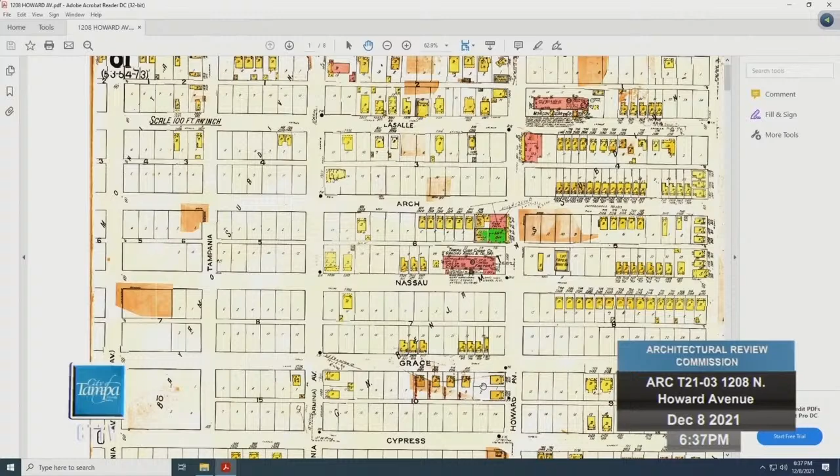I'd like to go through the photo presentation. It's a little different than what you usually see. This is in the West Tampa National District. The property in question is highlighted on the screen parcel here. This is Howard Avenue, and as you continue Howard to the north, you'll have the interstate that bisects it. I'll show you that in a current aerial.

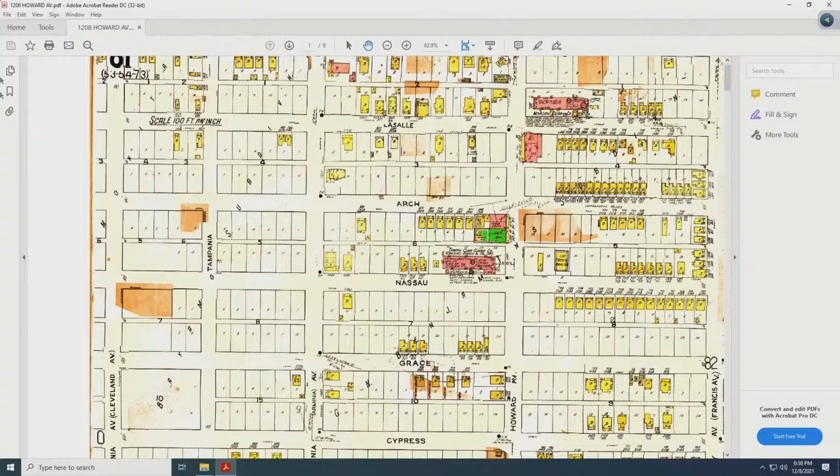This is a current overhead shot. The property in question is the period building, a 1-story building on Howard Avenue. As I stated, as you go down Howard to the north, you see the interstate here to get a point of reference.

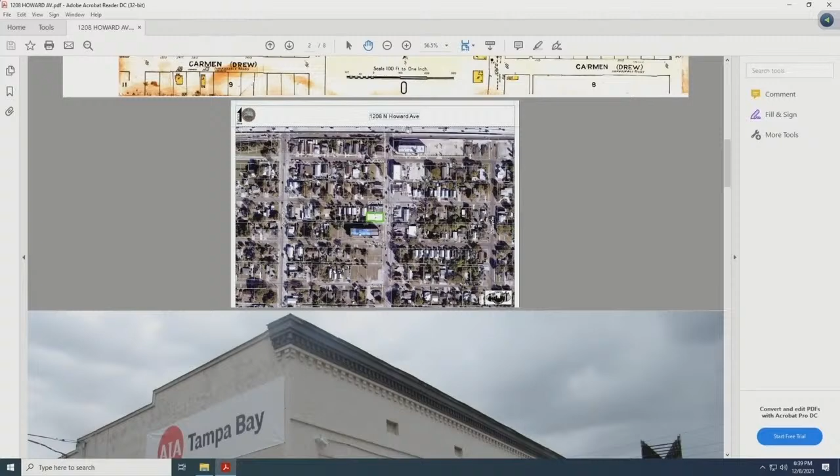This is the front elevation that's been modified, and the agent will share some other photos with you. This is Howard Avenue, so this is the east elevation, and this is the south elevation. Looking directly at the east elevation, which is the front elevation off of Howard. Once again, this is the east elevation, and this is the south elevation.

There is an open alley that will be improved as part of this project. Moving around to the rear elevation, which is the west side, there is a courtyard there that will accommodate parking. And just the last photo I'll share is, once again, the rear—you see some of the openings that were there, that were closed in, and then the parking courtyard.

At this time, the agent could address the board.

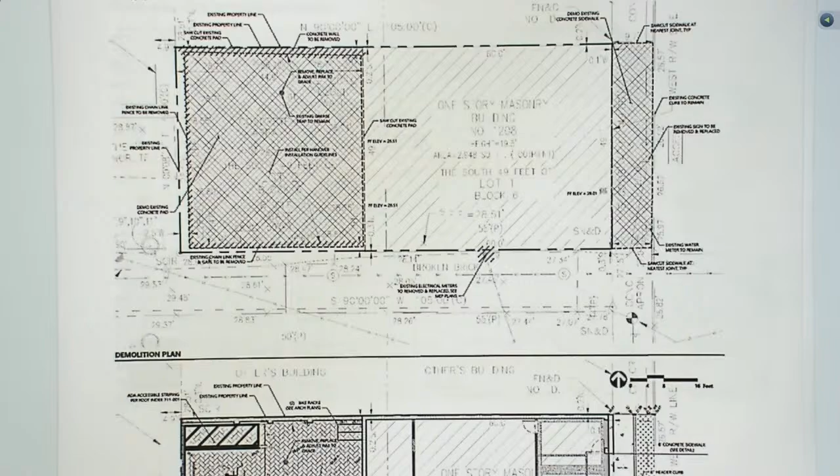I'll move this up a little further so you can see. We'll be able to get 4 parking spots in. We've already gone through the City of Tampa for design exception 1, which they approved, to have those 4 parking spots and bike parking. On the east side of the building, we'll improve that sidewalk and add a grassy area to match what's in front of the cigar factory right now.

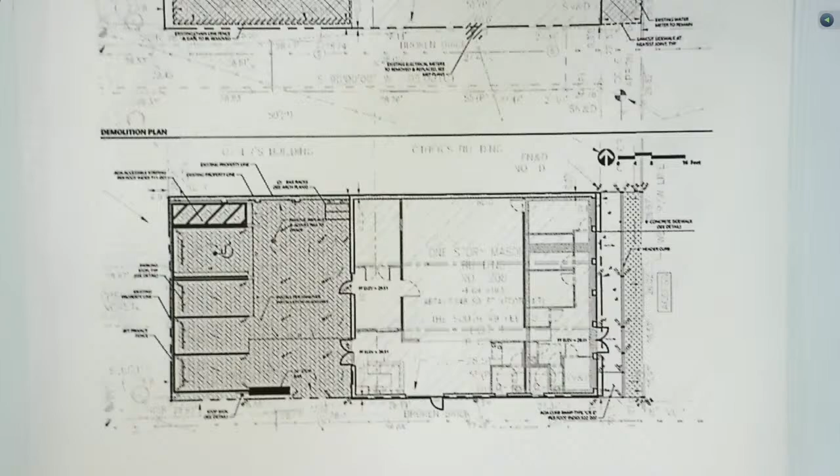What we'll be using the property for, as Ron spoke about, is for AIA Tampa Bay's new headquarters and home office. So it's going to house AIA Tampa Bay, and it's going to house the Center for Architecture and Design, where we'll serve not only our members, but the community through programs at the center.

You can see in the front facade there are architectural elements that were very common back in the early 1900s, with the cornice work on top, some corbelling over the window openings, and brickwork on the bottom. We'll have some details of those so you can see them. Our purpose for the outside of the building is to remove all the elements that were put in to hide those original features from 1904, to bring back what was happening on the street front when it was such a vibrant neighborhood, and we're helping to do that.

You can see the cornice work up there, the corbelling and the dentiling that's happening. It's in relatively good condition. We are going to restore it, and it's going to be painted. We'll show you some colors as we get into the presentation, but this is part of the characteristics of the building that we want to maintain.

Also, back in 1904, there was interstitial space between the roof and the attic, and these are typical to the buildings of that time. There are vent ways to make sure that the attic was vented and that water damage didn't happen through moisture. We're going to keep those and also accentuate those so people can understand what those were.

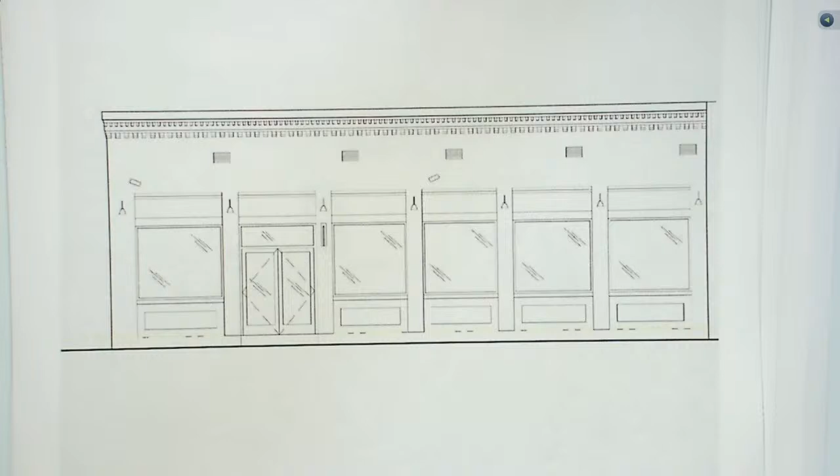This is a sketch of the proposed elevation of the building, the front elevation you'll see from North Howard Avenue. We're maintaining all the original brickwork and opening up those windows so you can see what it was like walking down North Howard Avenue back in 1904. This is a quick rendering of what we're hoping the building will look like once we finish the repair work on the outside.

There's some inside features we'll talk about as well. You can see the storefront, black trim, gray for the vents and also for the cornice around the top. We're going to have some period appropriate lighting on the outside, and the alleyway will be restored as well.

We would like to restore it. We understand the cigar factory next door has it in their scope of work, so we're working with that architect to make sure it gets brought up to speed.

For colors, we have a white for the main body of the building, and as I was explaining, the cornice work up top and the vent work would have the highlights of the cityscape gray.

The lighting fixtures we're proposing would be these. They'd be placed between each of the windows down North Howard, and we're also going to have a couple of these, since you'll see them from North Howard Avenue, highlighting the brand signage for AIA Tampa Bay and Center for Architecture and Design on the south facade.

YKK is going to be our storefront window of choice. We're going to use black trim, despite the other colors there, on the storefront windows, the storefront doors, and also on the south side and east side.

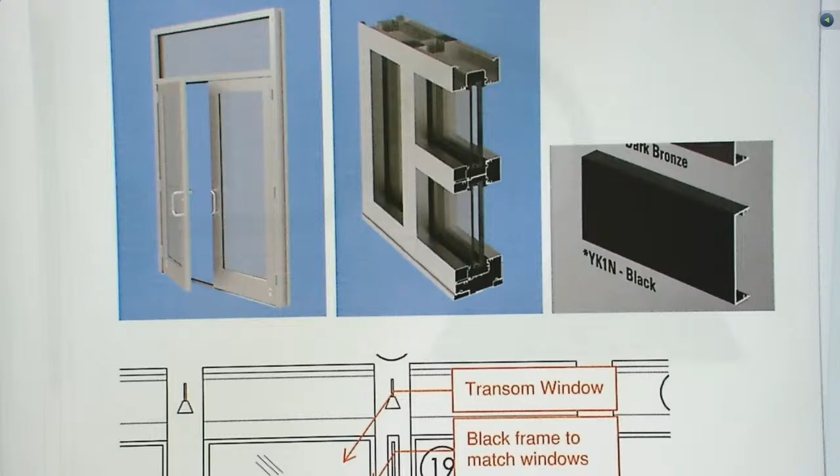On the east side of the building, the left-hand door will be a YKK door. Slim Pack, the door you see in the image below, has offered to also enhance the building with us, so that'll be the right-hand side door, a Slim Pack door. That's actually going to be the main entry because it's off the parking, so it'll come off the parking right into our entryway. Whether it's the YKK doors or the Slim Pack doors, it'll open up the views to the historic cigar factory to the south of us, which would be great.

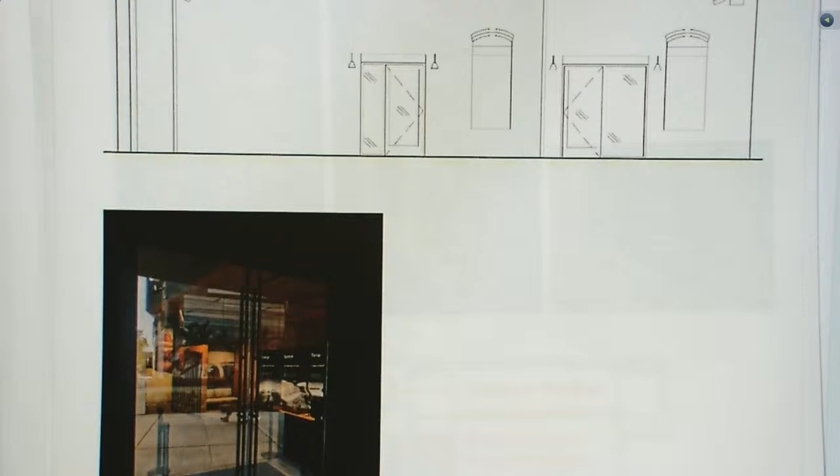To tie in with the color of the rest of the lighting, we need some safety lighting on the building. These are the fixtures we'll be using on the south side and east side of the building for safety.

And we will remove the exterior slab that's providing parking now, and improve it with some pavers—colors still need to be selected. It'll be a herringbone pattern so it can withstand the traffic flow coming in and out to our parking spots. When the spots aren't used for parking, we're going to use it for community events and board events as well.

We'll move to the inside of the building.

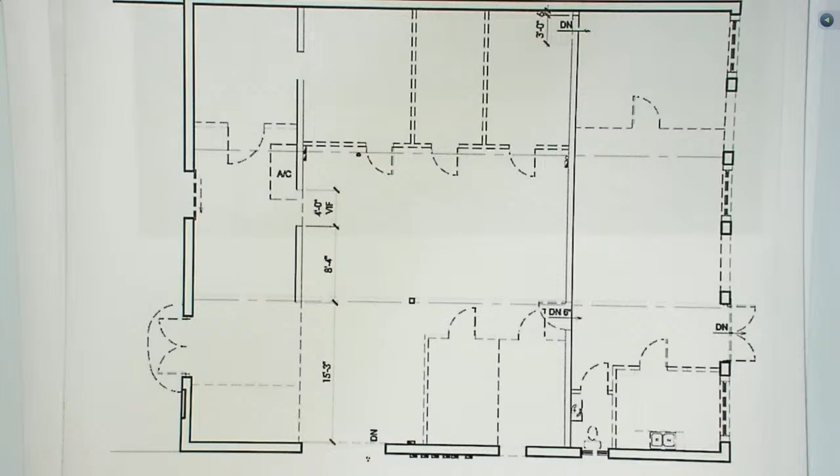On the inside of the building, there's a couple of things happening, but it's really the western side on North Howard, this area here, that has historic elements—a terrazzo floor, a stamped tin ceiling, and some older casings around the doors. We'll get into some of those things a little later, but our intent is to keep all of those floors.

One of the things we want to do is keep them and restore the floors. Where walls are removed for the new space, we're going to have a terrazzo company come in and match the color of the terrazzo so it's continuous from one side to the other and matches what would have been there.

The bases on the floors are a combination of things, but we did find this clay tile base, about 8 inches high. That's all going to stay in place, painted a different color to match the new color scheme on the inside. Where we take clay tile base off some of the existing walls, we're going to use it to patch the other walls together.

The clay tile base wasn't the only base that was used. On the North Howard side of the building, the base was a wood base. So where we're putting in new base, we'll use the wood base so we don't confuse it with the original base that was there, since we don't think it was original. I've got two more pictures coming, but we'll get to that in a second.

The stamped tin ceiling - we have a couple pictures of that right now. Over the main portion of the North Howard side is a 2x4 acoustic ceiling, hiding what's there, but it's stamped tin ceiling, complete with crown molding going around. We're going to save all of that throughout that entire half of the space. One office was already improved, so you can see how it's going to look - our stamped tin ceiling will be painted white instead of brown. All of these elements are only on that North Howard side of the building.

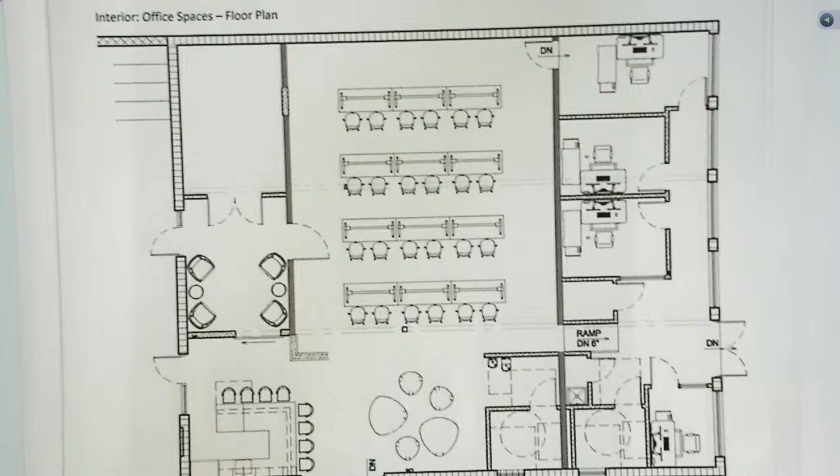This is what the proposed space will look like at the end of the day. As you can see on the North Howard side are our offices. We have 4 offices, we have the restroom, and we have a new restroom on the other side of that demising wall, in that space where our gallery is going to be. And that gallery is for community events and art galleries.

Is that telling me to stop? Yes, sir. Okay, I'm almost done. You want me to stop or keep going? Let's stop, and then if we have any additional questions based off that, you'll have time to answer the rest. The rest are finishes and things for going forward, but we hit on all the historic items.

Thank you. At this point, staff will present the staff report.

Good evening, Commissioners. Ron Velam, staff with Historic Preservation. The request this evening is for an ad valorem tax exemption, Part 1. This is pre-rehabilitation.

So through this adaptive reuse request that you saw this evening, we look at the exterior and the interior, whereas a lot of other requests we just look at the exterior. If this moves forward tonight, staff is involved with the process throughout the rehabilitation, and then he will have to come back for Part 2 of the ad valorem to show you the post-rehabilitation.

When we met on site, we look at the building and see what the building is telling us. There's a lot of scarring that's left behind. You have to do some forensic work, they opened up some walls to kind of see exactly what's there.

If there's missing elements, the Secretary of Interior standards state that you could use an appropriate alternative material. So the materials for the storefront don't have to go back to a wood storefront that would have been originally there of the period. So the products that he showed tonight are consistent with the Secretary of Interior standards. I'm here to answer any questions.

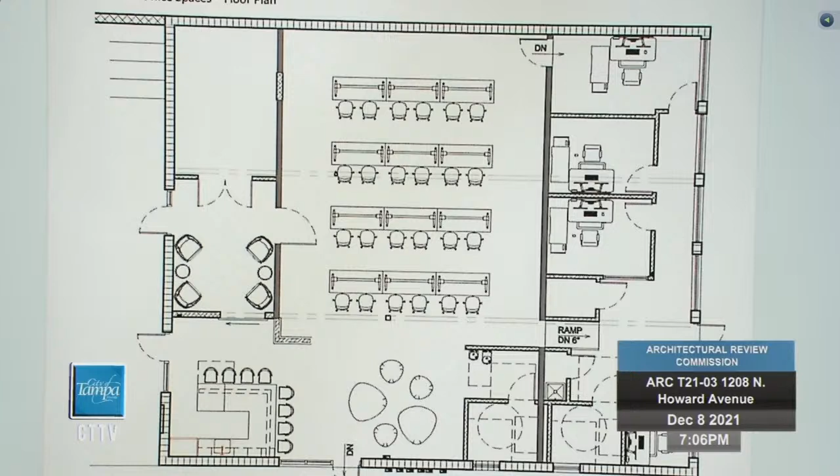You're opening up the windows. There's kind of a chain of questions here. Was the building initially a bakery or a restaurant? It was initially a restaurant. It had a lot of uses over its years, as you can imagine, but it started out as a restaurant that served at the cigar factory.

Over time it was a bakery, and it was a yeast factory - Fleischmann Yeast - for a while. It had time as a furniture shop, and most recently it was just storage for whoever owned it. Because you're opening up the windows, and we're now trying to pay attention to pedestrians, you have mostly blank walls - you're going to look through those windows and not see much.

I was wondering about that. I'm glad you're asking. So yes, it would be blank walls. About 4 feet up, you're going to have a blank wall for the office - they're 9-foot high walls, by the way, so we don't interrupt the ceiling. But our vision for this is to get a mural put on the walls. It wouldn't be a bold mural, but it will talk about the architecture and history of Tampa Bay, so when you're walking by those windows, you know what's happening inside the space - it's not just a blank white wall.

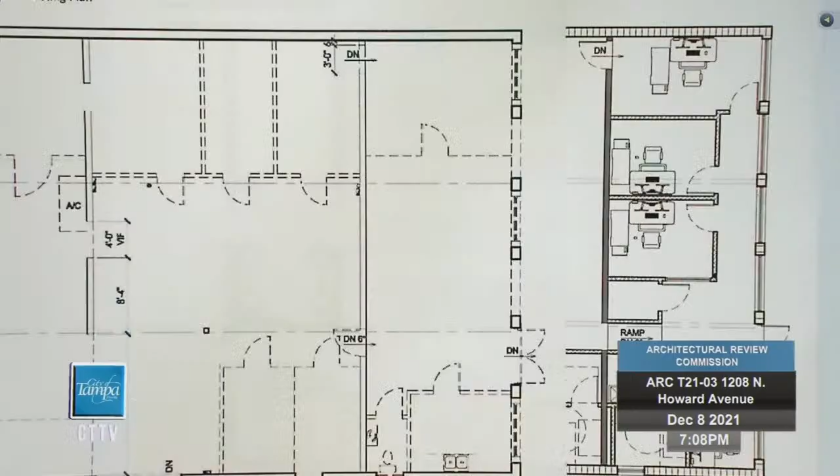The stamped tin ceiling - let's see, we'll put these side by side so you can see the difference between the two. So the terrazzo around this wall - there's a green line here that goes on either side of that wall. The green terrazzo also goes around the perimeter and comes around the kitchen. It does not go into here, and there are spots where it doesn't exist.

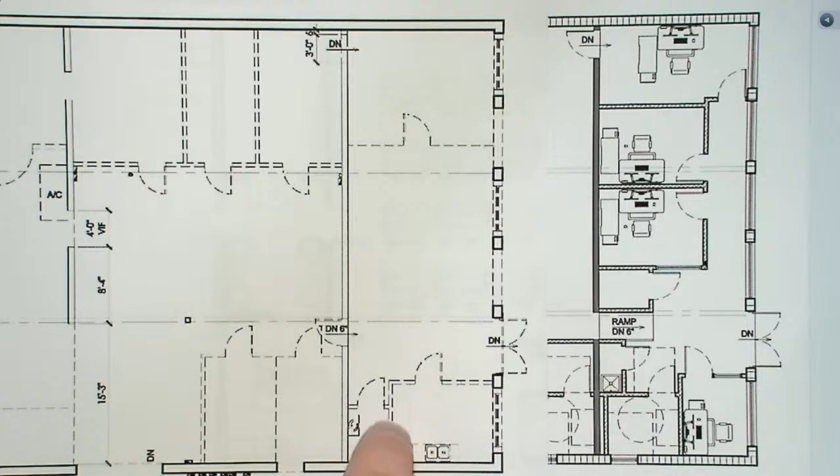Even though there's a wall there, the green line didn't exist on that wall - I'm not sure what the thought process was behind it. This wall doesn't have the green line. The green line comes through that wall and goes around the kitchen, but then it stops at the bathroom, where you saw an unpolished terrazzo or some other material.

So the way we're going to know where those walls were is that the new walls will only be 9 feet high - it's a 12.6 high ceiling. So when you're in that space, you'll be able to see over the walls, and you'll be able to see the pattern of the stamped tin ceiling.

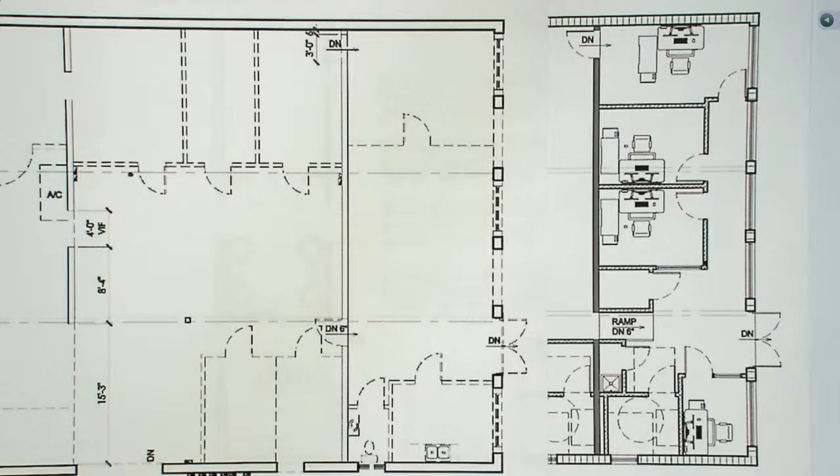I'm going to put this here too, so you can see all three. You can see how the stamped tin ceiling actually has a different pattern, even from the walls that were there. It does follow the pattern around the restroom and the kitchenette. This looks like it picks up the beam on the other side. There's also another beam here, and of course this wall here.

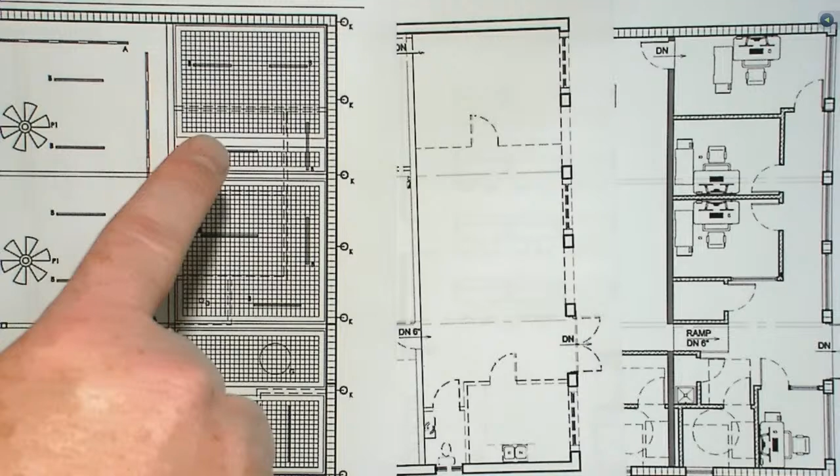So we're going to leave all that there. You're going to be able to see where all those original beams were and how the corners work, because none of the walls are going to go to the ceiling, not even the bathroom walls. We're keeping those low, and putting a lid over it for privacy, so you can see over them no matter where you are within the space.

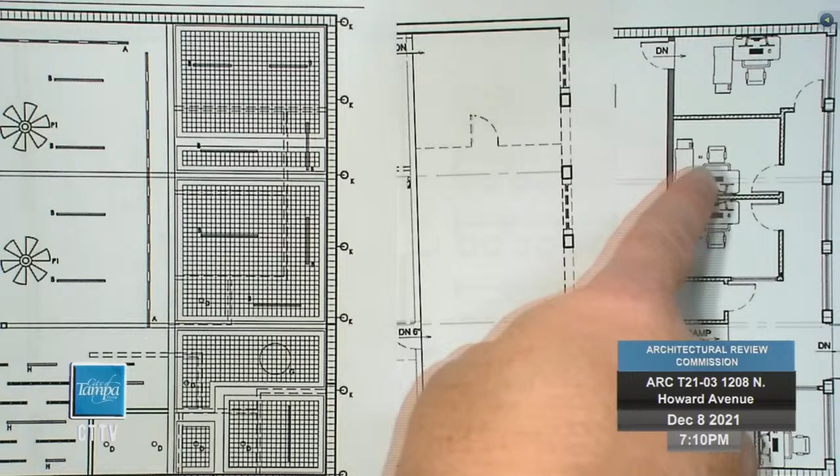And then for the terrazzo, if you're in this office, for example, you can see where the old wall was. You can have a green line going down the middle of the office, and people can ask what that green line is for, and you can tell a story.

So you're going to paint a mural on the wall of the two smaller offices. And then you have this long wall that represents something from the 1930s that forms the border of the terrazzo and the tin ceiling, right? Yes, that north-south wall. And then you have this large open space that is going to be very active.

My question was, we're trying to activate the sidewalk. It would seem more appropriate to have that more active space at the sidewalk, and you're putting a mural there instead, so that's a reasonable response. But I didn't understand why this choice was made to not put the most active space at the front.

Well, part of it is space. The back space is our gallery space. It's where we have our board meetings, it's where we have community events, and we could have 30, 40, 50, up to 80 people at those events. The front space simply isn't big enough to hold that much of an audience.

Right, but I don't understand the reason for keeping the wall, I guess that's my point. The wall that forms the west wall of the offices goes north and south. There is also a change of elevation there, a step. There's a 6-inch step that goes down right here.

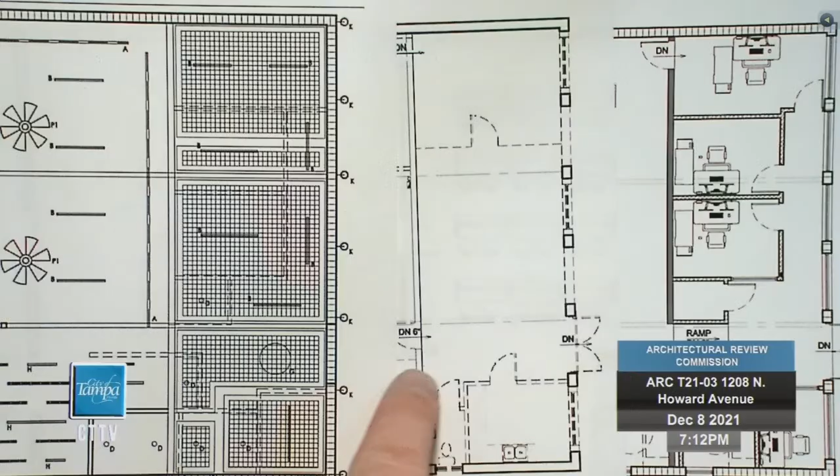You're higher here, you're lower there. So that's also another reason we have to put a ramp there, to make sure that we can keep the front and the back accessible. So there wouldn't be good flow if we took the wall down — there'd be a step in the middle of the space. Or you'd have to get rid of the terrazzo, raise the floor, cover the terrazzo, and we wouldn't want to do that.

Yeah, I know. Okay, got it. Thank you. Thank you. Yeah, I probably would have answered some of those, but I'm glad you asked that question. Thank you for that.

Is there additional parking off-site for the building? There is not. There's street parking that can be used. We're also looking into speaking with St. Leo's to see if for larger events we can rent space out. At that point, it's 2 blocks up at the other cigar factory that Ron had pointed out, next to 275. And if the cigar factory moves forward with their plans to renovate into a hotel, we'll also speak with them to see if we could use that if needed.

I don't have any additional questions.

I have one question about the exterior. So we've looked at what the roofing is, the exterior brick, kind of the exterior side of that. For any of the entrances and doors, do you have any plans to do any sort of covered overhangs or recessing those doors in, similar to what you'd see in some historic districts such as Ybor, where you pull that door in to create some separation from the rain and elements?

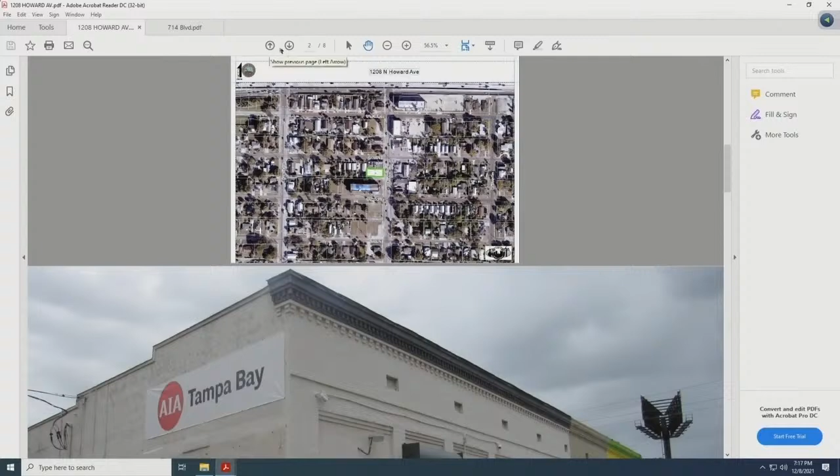Here, looking from the south to the north - this is the property we're looking at here. Although they share the same coping and dentil molding, if you look at the penetrations themselves, they differ. There was some discussion today about putting maybe some horizontal component here, over a door to define the door. It becomes very problematic with today's code - this is grandfathered in, but there are dimensions from grade from the sidewalk to the underbelly of that, and then the projection from the facade to the street. So it'll be very challenging to put that in at this particular time.

There are some additional concerns raised tonight about the curbing. There's a granite curb in place, and the sidewalk has modules that are more period appropriate - about 3x3 modules that are more historically correct as well.

I have a further question - I know you showed signage in your elevation. Was any of the signage projecting, or is it all flush? We have one blade sign coming off the door front - can I see that again?